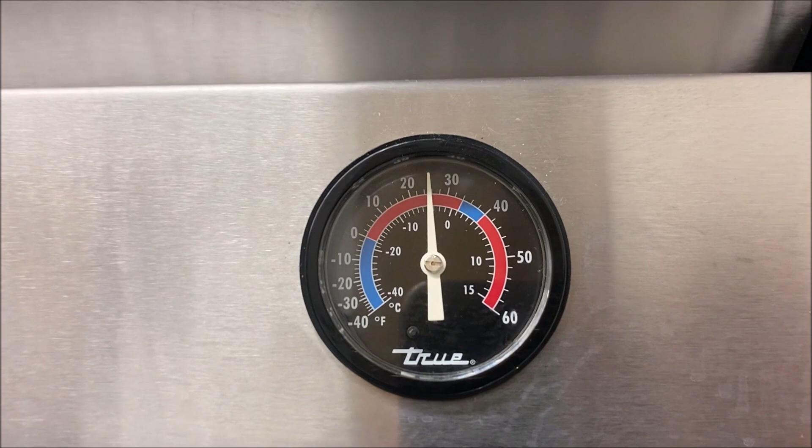Hello everyone, today I'm working on a True reach-in freezer. We're not getting below 25 Fahrenheit. I just changed this compressor probably 8-9 weeks ago.

Alright, so we're going to pull up our refrigeration checklist here before gauging up. These are all the steps we're going to follow. Don't mean to sound like a broken record, but we're going to follow this chart every single time. We're going to do the exact same routine every single time where it becomes muscle memory and we don't even have to pull up this checklist anymore. It's imprinted in your brain.

All right. And what happens when that happens is you're basically on autopilot. When you're on autopilot, now you're working thoroughly, you're not taking shortcuts, and most importantly, you're working efficiently and you're troubleshooting very quickly. So first check, is our evaporator coil frozen? We're gonna check our fans on our condenser, on our evaporator. Are they running? Are the fan blades damaged? Is our condenser coil dirty? And is our compressor running?

All right, so let's go check our fan 1, fan 2, they're running. Let's check for any freezing or frost. We have some light frosting on the evaporator coil, nothing to worry about. Next, we're gonna check our condenser fans. They're both running. Our condenser's clean because I just cleaned it, 5, 6, 7, 8 weeks ago when I changed the compressor. All right, so we've completed everything on our checklist. That means it is now time to gauge up.

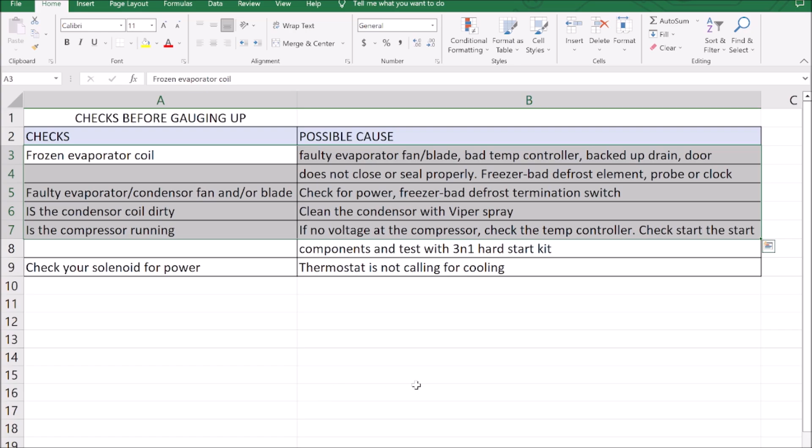All right, so let's toss our gauges on. We are at 48 and 185. All right, so let's go figure out what our pressures need to be. So because we have a cap tube, we're gonna take our desired box temp and we're gonna subtract our evap TD. So desired box temp, let's call it 0 Fahrenheit just to make the math really easy, and we'll subtract our evap TD, which is 20 Fahrenheit, and that gives us negative 20 Fahrenheit. Pull up our PT chart here. And minus 20 Fahrenheit equals 16 psi, and we are getting 48 psi.

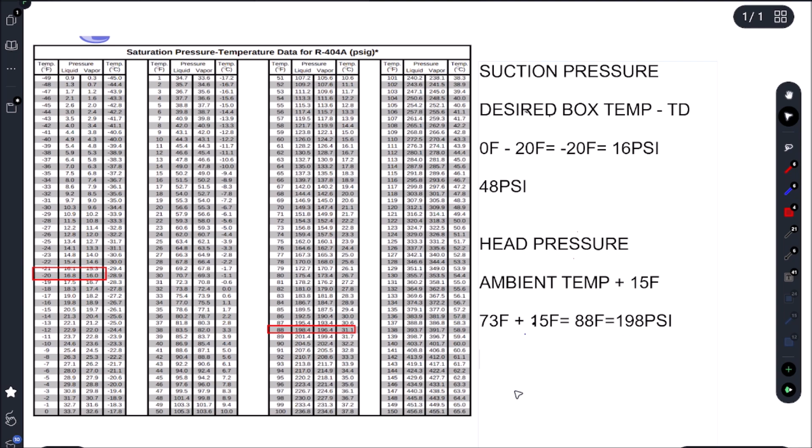And to figure out our head pressure, we're just going to take our ambient temp and we're going to add our condenser split. In this case, it is 15 Fahrenheit, so we're going to go 73 Fahrenheit plus 15 Fahrenheit gives us 88 Fahrenheit. So let's pull up our PT chart once again. 88 Fahrenheit liquid pressure gives us 198 psi. And we have 185 psi.

All right, so we have 48 psi on our suction, and we are looking for 16 psi. And on our high side, we have 185 psi, and we're looking for 198 psi. So that means we have high suction and low head. So we're gonna pull up our refrigeration cycle pressures chart and we have high low. So that's telling us we have a bad compressor. Well, I just changed this thing like 2 months ago.

So what I'm gonna do here is I'm gonna just pull the refrigerant, pull a vacuum, a deep vacuum, 500, 400 microns, pump some gas back in, and let's see if our pressures change. All right, vacuum's completed. We're recharging and we're at 33 and 151. So we have 33 psi on our suction, and on our high side we have 151. So what does that mean? We still have high suction, low head. Nothing has changed. So we still have high low. So that means my new compressor, 8-week-old compressor, is done.

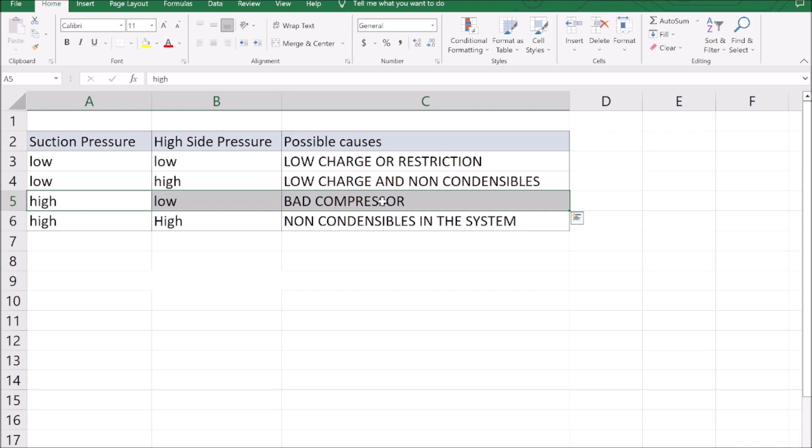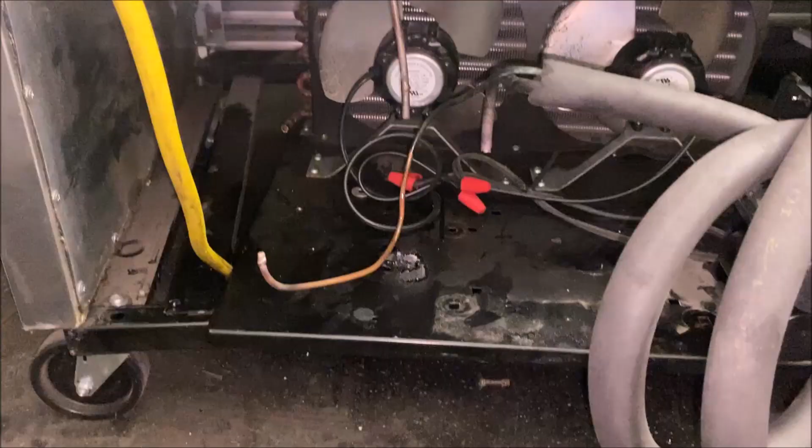All right, so I'm gonna go ahead here and do an acid test. It's just one of these ones you throw on the suction side, and it has passed the acid test. So it's telling me the oil and everything in the system is good to go. So I've been very fortunate. I have not had a compressor go bad on me in a very long time. I'm talking 2, 3, 4, 5 years. So at this point, I'm in absolute disbelief. Did I miss something? Did I not follow the procedures correctly?

Okay. So what I'm going to do here is go above and beyond, and probably what I should have done in the first place. So I'm going to blow some nitrogen through the system. So you can see here, I'm coming through the condenser coil and we're going to blow everything out.

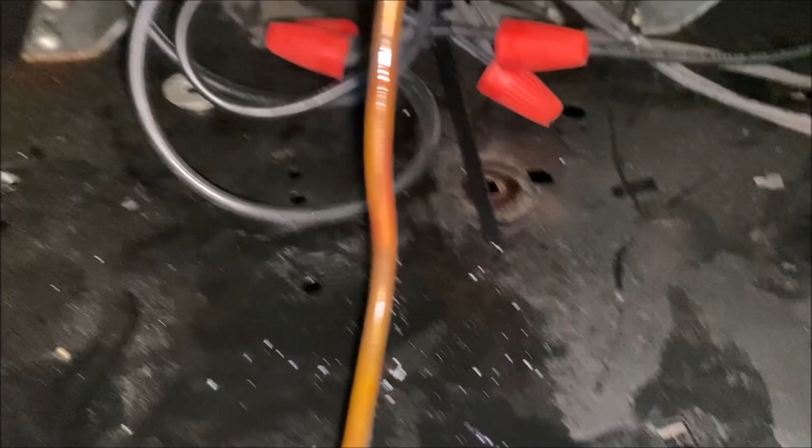Okay, we already did our acid test, but I'm not taking any chances. If I made a mistake, I need to make that right. So we're going to go above and beyond. Overkill. I'm kind of rattled a little bit that I blew a compressor here. And we're going to blow out both sides of the system.

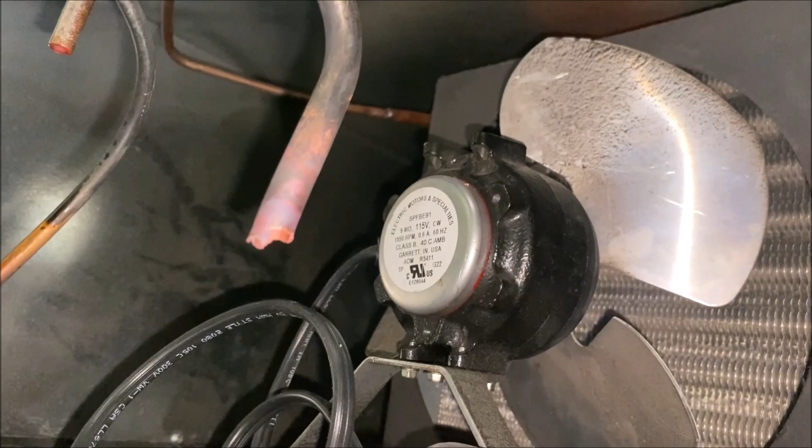Because the system's open, we only blew out one side. Now we're going to blow out the second portion of the system, push everything out. Like I said, we want to make sure 100% that we're not making a mistake. Maybe I did make a mistake, but I know I vacuumed everything correctly. I did not go overkill blowing all the lines out like this last time, and I didn't do an acid test. Maybe it's something I need to do going forward.

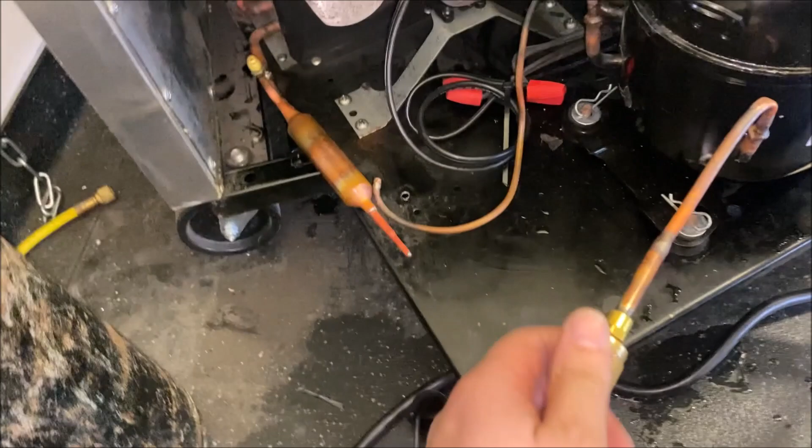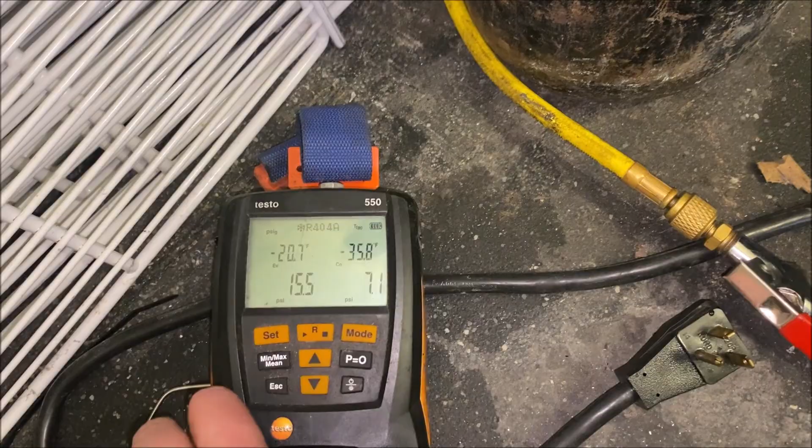All right, and we're gonna blow out our cap tube like we always do. So one end brazed up. We're gonna blow it out at operating pressures. Because we have a freezer, we're gonna be closer to our 20 psi, so we're gonna try to get as close as possible to our 16 to 20 psi. Make sure we have good pressure.

Last thing we want to do is button this whole thing up, and then, from blowing all that oil out, who knows, maybe I restricted this cap tube, but we're all good. Cap tube is flowing. One other thing we're gonna do is change our oil in the vacuum. I'm not taking any chances here.

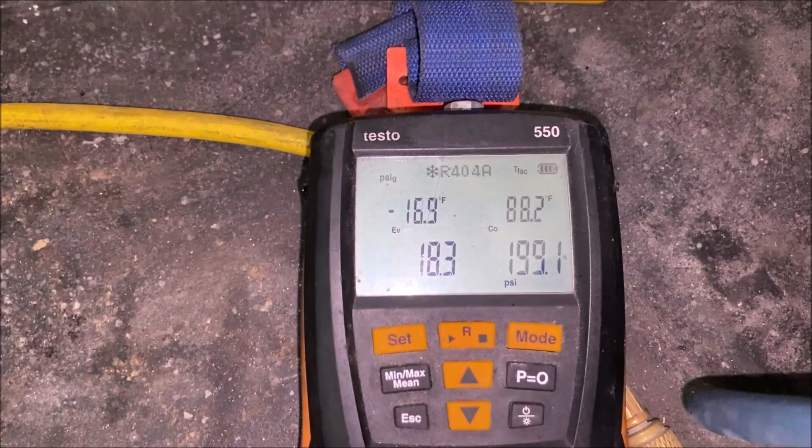All right, so we've vacuumed the system, we've recharged everything, and we are at 18 and 198. Our suction pressure is now 18. We're looking for 16. We're within the range. Because it's a freezer, we're at 0 Fahrenheit desired box temp to, let's say, -10. So a variance of 1 or 2 psi is not going to matter.

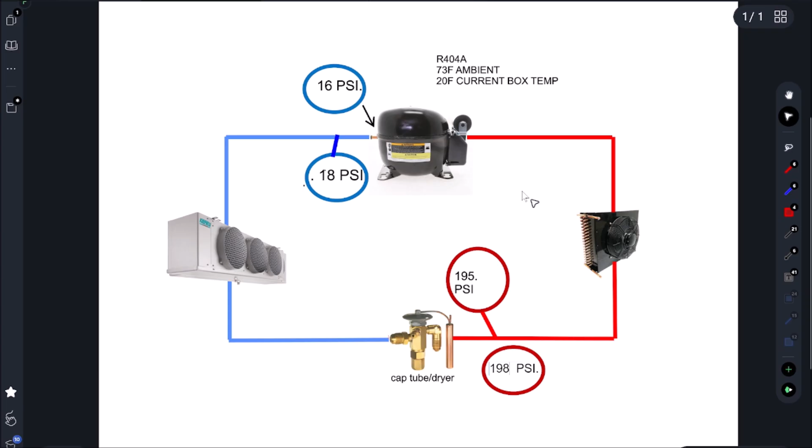On our high side, we're looking for 195. I have 198. So the compressor is now doing its job. It's pumping correctly. Last thing we're gonna do is move the refrigerant from our high side gauge to our low side because we're critically charged. We don't want to leave 195 pounds of pressure inside my hoses, because that could be the equivalent of 1 or 2 ounces. Keep in mind it is liquid, so I'm going to slowly throttle this in.

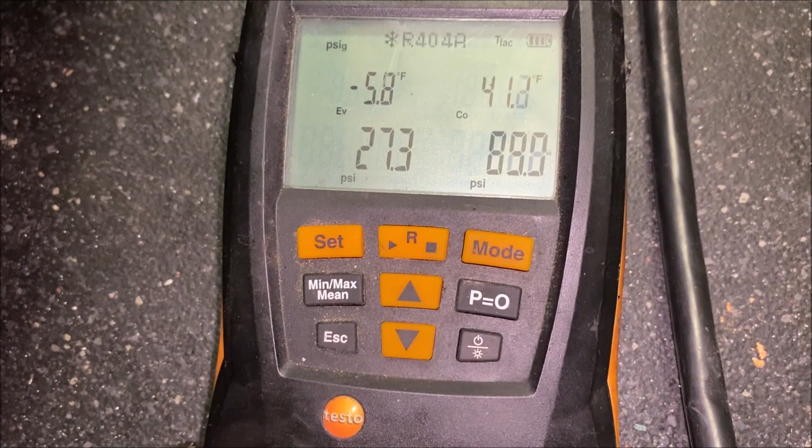I'm just going to open up my high side, slowly open up my low side, and it's going to move the refrigerant from the high side, the liquid, into the low side of the compressor, and that 1 to 2 ounces won't be removed from the system by just pulling my gauges off. Our gauges are equalizing here, so we're almost there. We're good, and our temperature is at 0 Fahrenheit. We've passed the stress test of 1 degree Fahrenheit per minute, which means we are all good here.

As you can see there, we had a high-low situation. That's telling us that we need a compressor. Because I changed this compressor about 2 months ago, I did decide to pull the charge, vacuum the system out, and put new refrigerant in the system. This, of course, changed nothing. So at this point, I got to figure out what I potentially missed when I originally replaced this compressor.

So I decided to blow out the lines more than I normally would, and I performed an acid test. As you can see, the acid test did pass, indicating no acid in the system, but that leaves the question of why the compressor failed. Like I said earlier, it's very rare that I have a compressor fail under warranty, because I make sure to follow proper refrigeration procedures. Now, it's possible that it was a bad compressor from the start.

This is a situation you can't get caught up on, and you just need to move on from it. Sometimes these kind of things just happen. Now, if this type of thing is happening frequently, we really need to review our procedures and see what steps we're potentially leaving out.